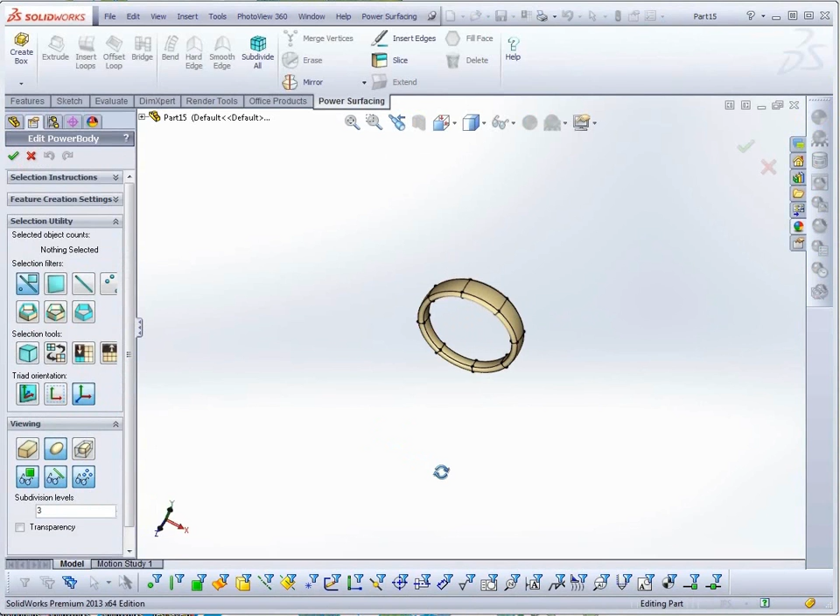The imported models can be simple templates, such as this ring blank, or can be nearly finished models brought in for minor tweaking and the addition of SolidWorks features.

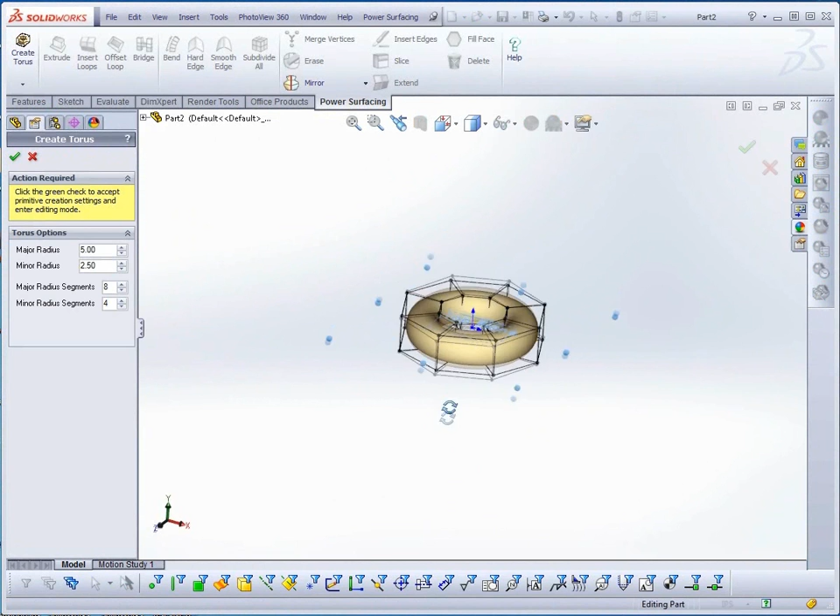Power Surfacing also provides you with several pre-made template objects, the box and torus being the most useful. They are created as extruded meshes at the origin from the top plane. You can set their dimensions and base topology before moving into edit mode.

The secret to efficient sub-D modeling is to work with a minimal amount of geometry as long as possible. Best practice is to avoid adding segments until you actually need them.

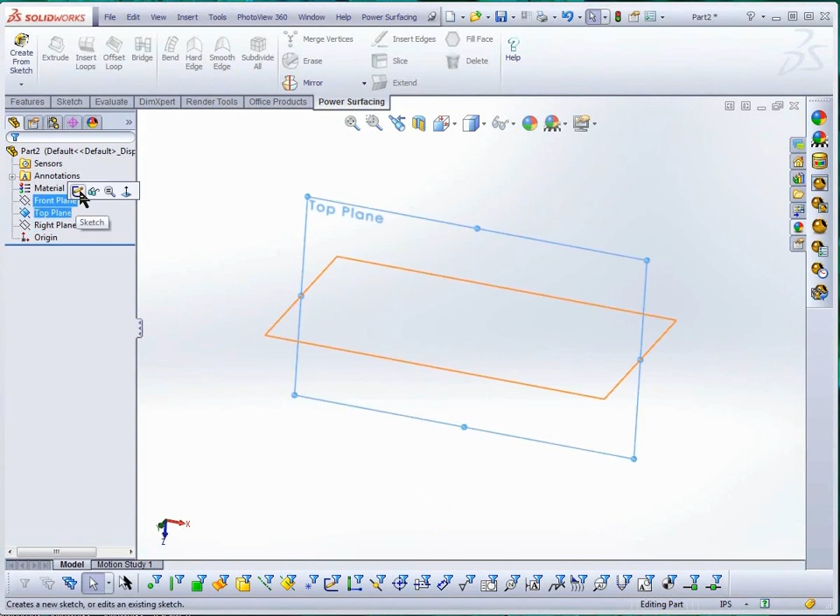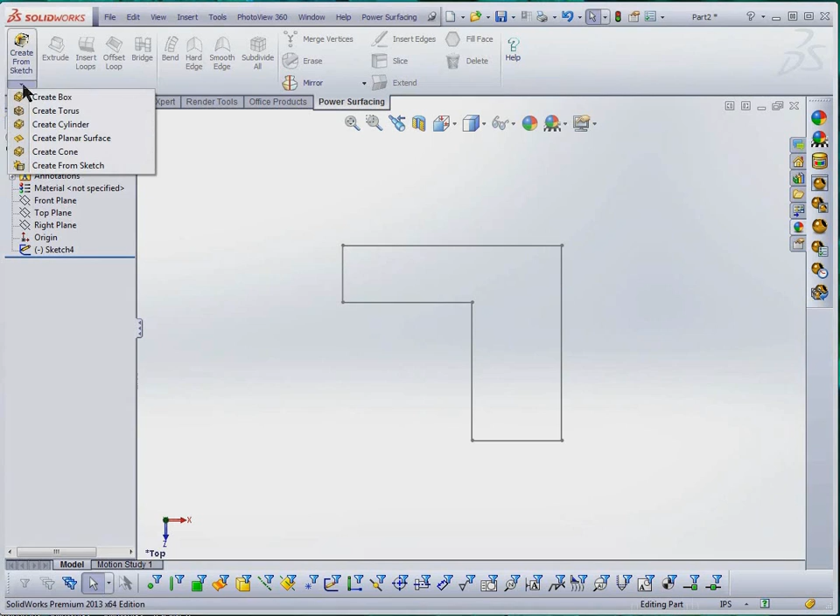The third way to start your sub-D is with a sketch. This allows you to start with a predefined location and orientation. With Create from Sketch, you have two options. As a mesh, the sketch can be extruded up from its construction plane, or both directions from midplane. Sketches over 4 sides will use only the bounding box, so keep it simple.

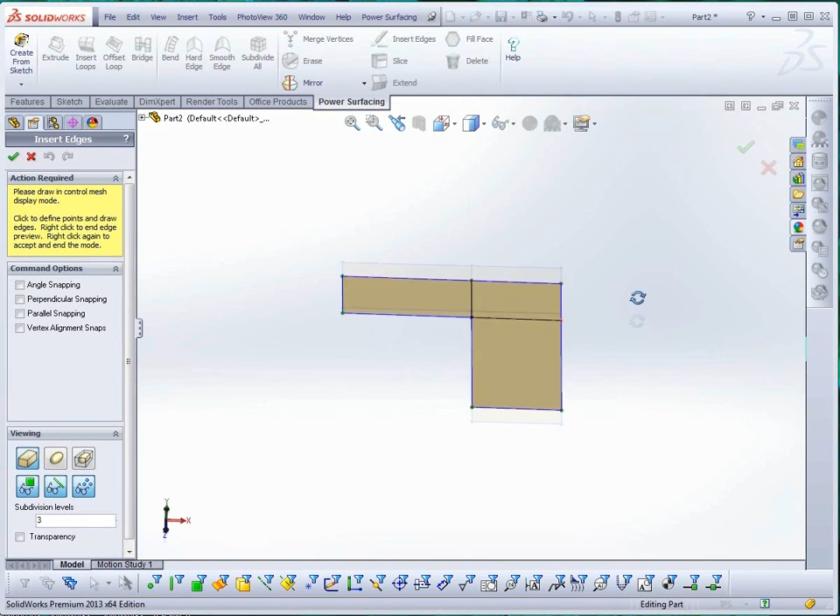The other sketch option is to use the sketch to create a surface. This more advanced option will allow for more than 4 sides, but may require you to manually retopologize the resulting surface. Curved edges will be recalculated based on sides per 360 degrees, so once again, keep things simple to start.

Whatever method you use to start your sub-D, you are defining the control mesh that is used to create the subdivided model. Defining dimensions, location, and orientation is only a starting point.

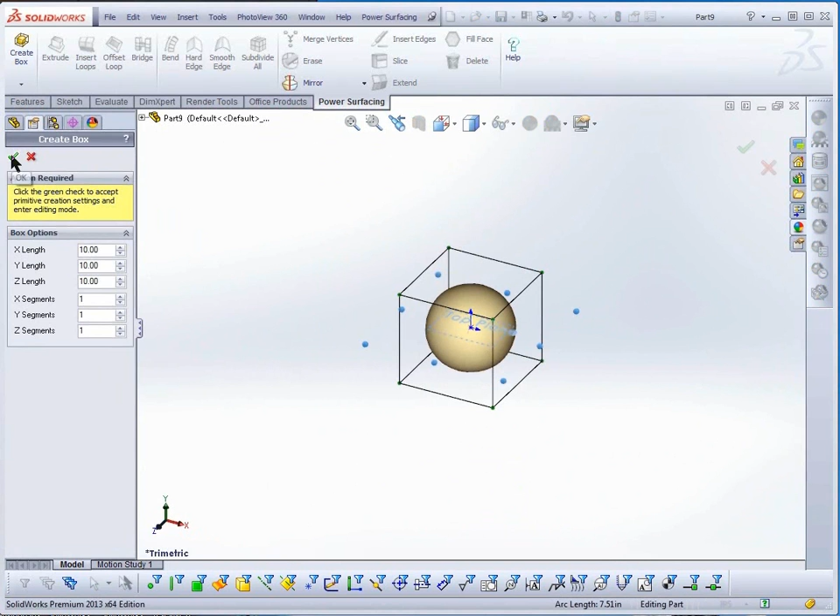That being said, I'm going to begin with the cube primitive. When I'm happy with its parameters, I'll click Accept and go into Edit mode. The newly created sub-D model appears with its control mesh displayed as a cage.

If you are new to sub-D modeling, the most important concept to understand is that sub-Ds subdivide planar faces to create rounded surfaces, and the most desirable face is a quad.

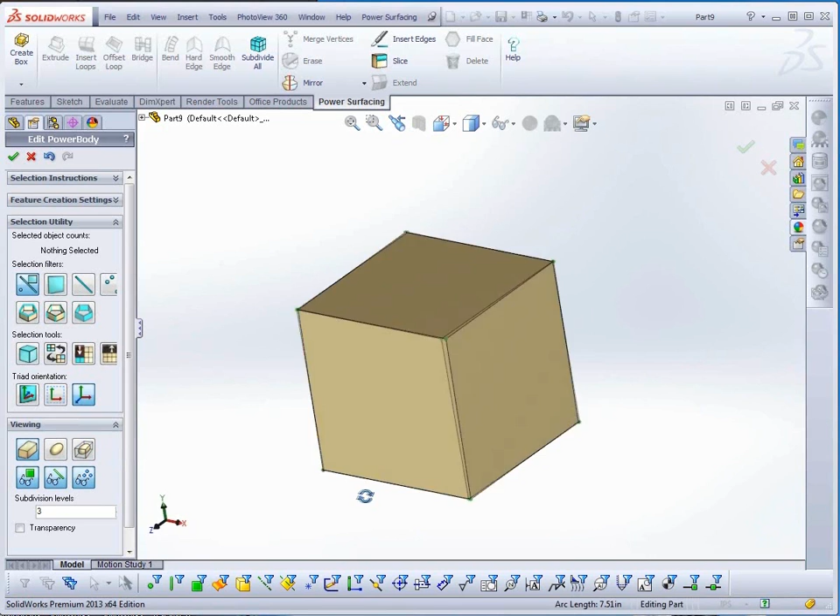In the Command panel, in the Viewing section, try selecting each of the 3 display options. With Control, the control mesh shows the base object or control mesh that is used to create the sub-D model. Sub-D stands for Subdivision Surface.

The sub-D display mode shows the subdivided model along with the control mesh's edges and their new locations. The default display, sub-D plus cage, gives you the best of both while the model is still very simple. It allows for easy manipulation of the faces, edges, and vertices from their control mesh locations while letting you see what the final sub-D mesh looks like.

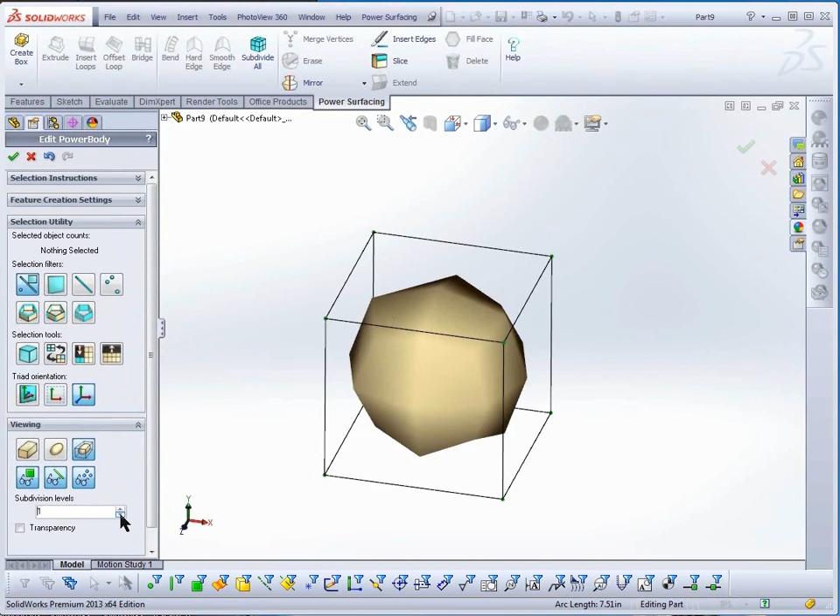You can change the number of sub-D divisions displayed in the viewport from the Viewing section. Note that this will not affect the finished NURBS object.

Let's go ahead and move the mouse over the cage and model. As the cursor passes over the various elements or sub-objects, they are highlighted orange. In the Select Any mode, the default, you can select vertices, edges, or faces by picking the highlighted element. The selected elements will become blue.

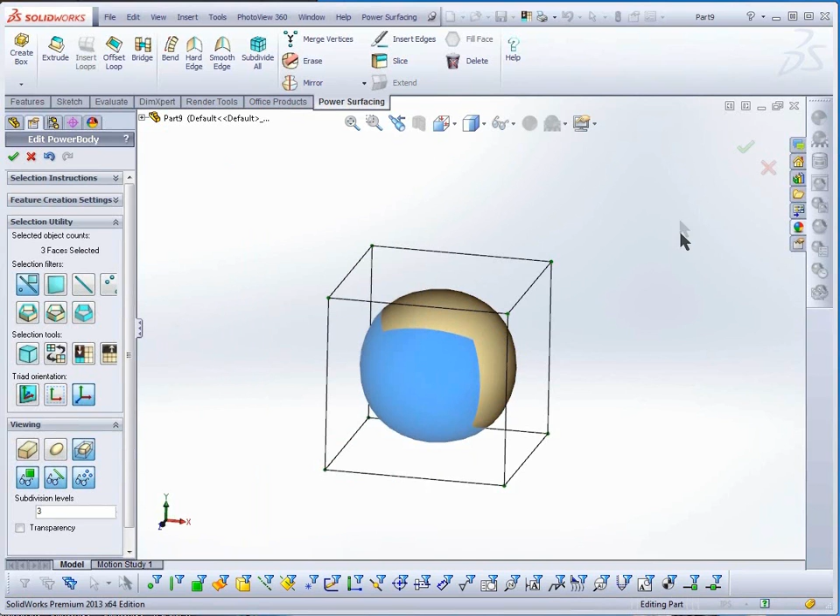You can hold the Control key down and continue picking, or Region Select to add to the selection. Region Select works the same as the rest of SolidWorks. Dragging from left to right selects Windowed, while dragging from right to left selects Crossing.

Note that as soon as you select an element and hold down the Control key, you will only be able to select more of the same type. To remove from the selection, hold the Shift key and pick or region select. Releasing the Shift or Control keys returns to the Select Any mode.

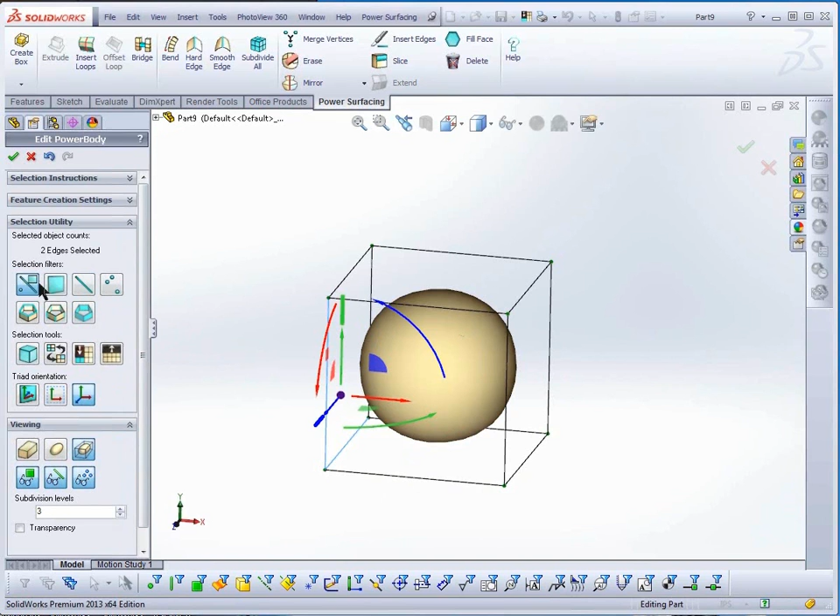To restrict selection to a specific sub-object, you can choose its mode from the Selection utility in the Command panel or from the right-click menu. The right-click menu has several of the most commonly used tools and commands on it. It can also be accessed with the S key.

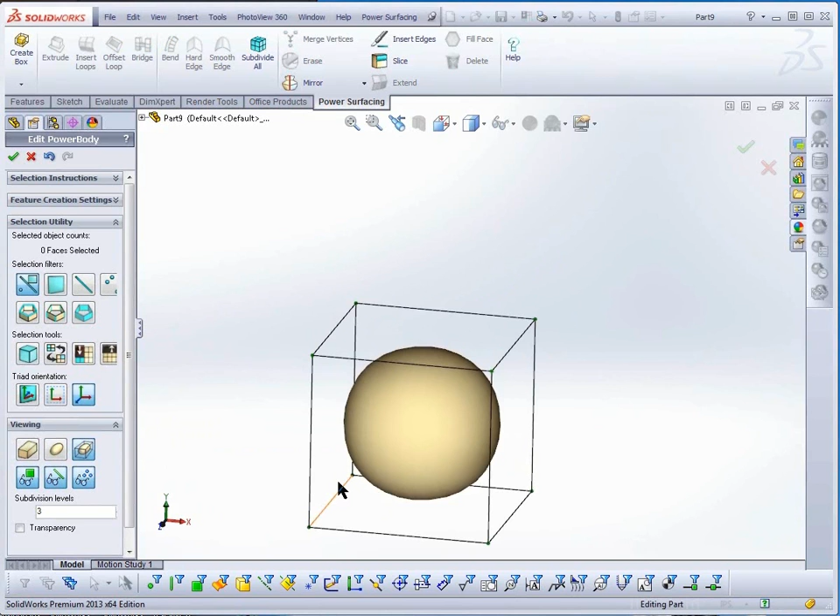The two most common means of editing the sub-D are extruding and creating new edge loops. Power Surfacing has several tools to help you edit your sub-D. Let's start with the Extrude tool.

Select a face on the mesh. Choose Extrude from the right-click menu or from the toolbar. The face is extruded out, and the extrude parameters are shown in the Command Options rollout over in the Command panel. You will also notice that the context-sensitive gizmo has changed to reflect the new options.

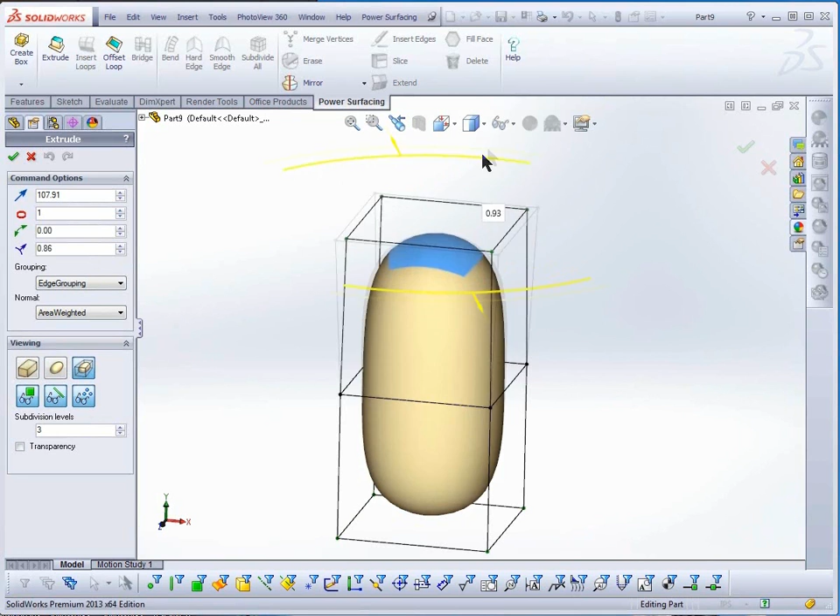With Extrude, you can adjust the extrude distance with the Distance gizmo, scale the extruded face with the blue Expand gizmo, and rotate the face with the green Rotate gizmo. You can also increase the number of segments with the red Increment gizmo. To use it, click and drag up and down in the viewport, regardless of its orientation. You will see these specialty gizmos in several of the other editing tools.

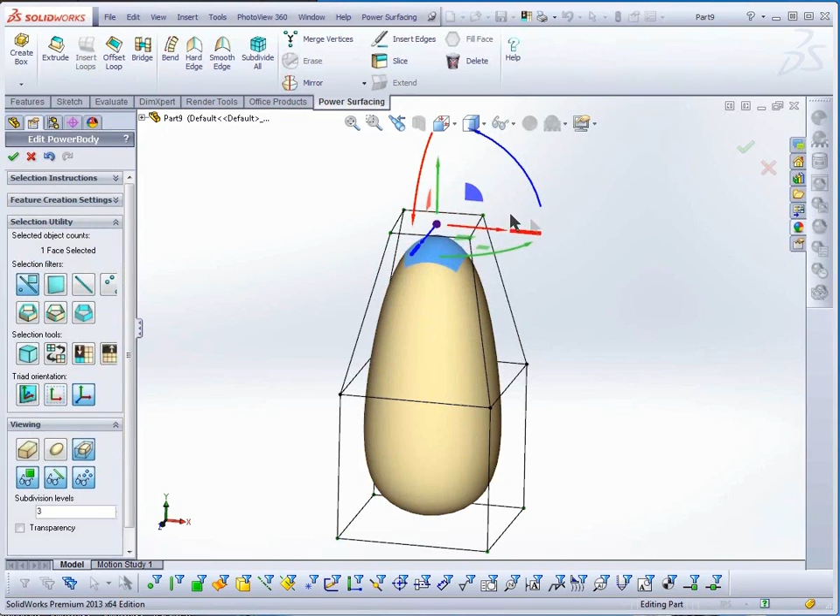To complete the command, right-click, press the familiar green Accept checkmark, or press the Escape key. The Transform gizmo reappears. If you change your mind, simply press the Undo button or Ctrl+Z.

Besides the usual constraints using the X, Y, and Z axes, the Power Surfacing triad allows you to move and scale on two axes at the same time.

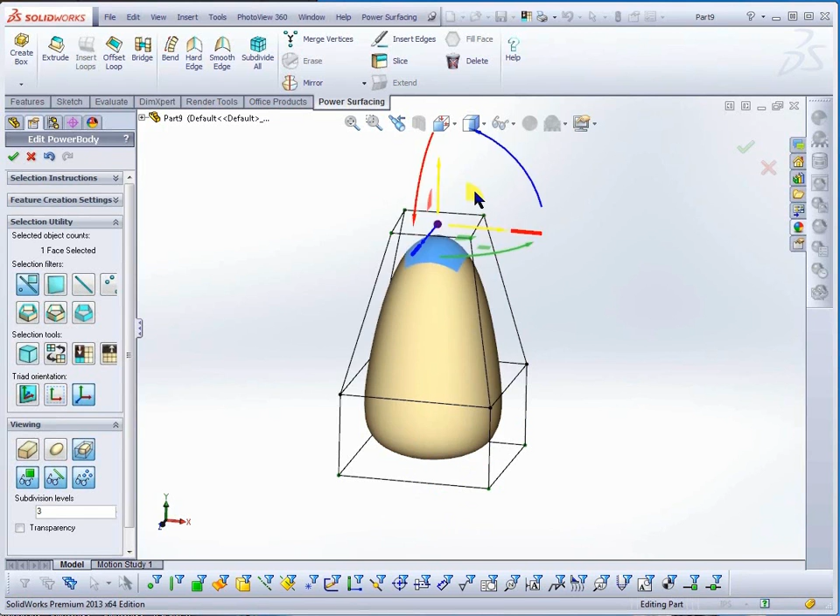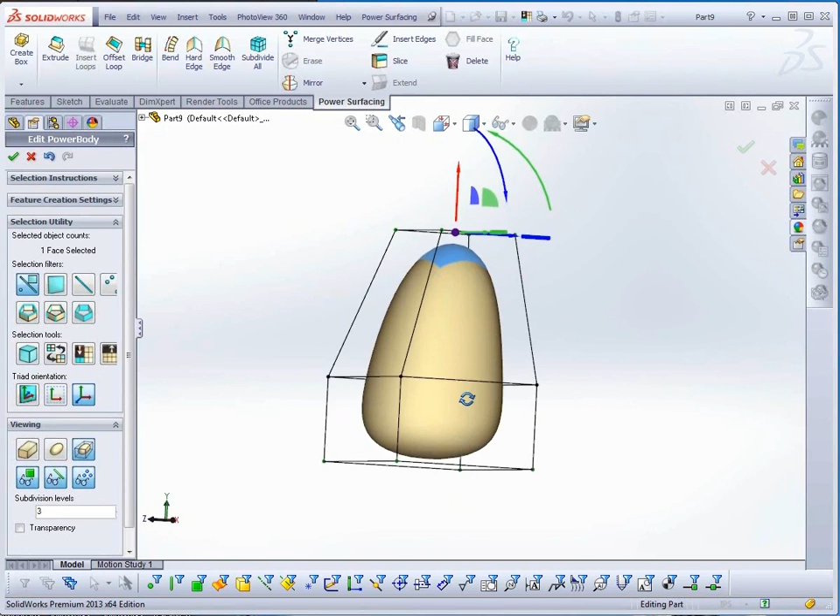The fan-shaped marker lets you move in two directions, and the diamond-shaped marker allows you to perform non-uniform scales along two axes. Uniform scale uses the small sphere at the center of the gizmo.

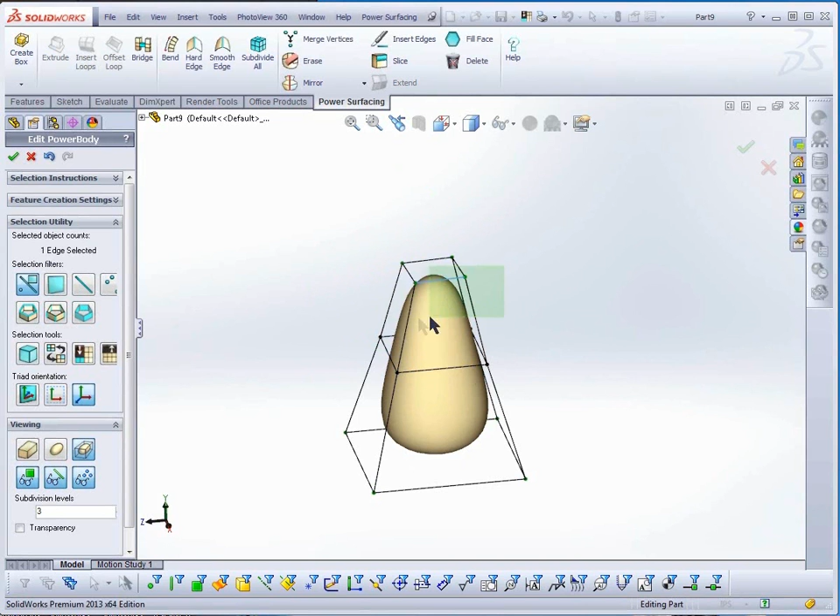The triad, or transform gizmo, is also context sensitive. Only elements relevant to the current selection will be available. Depending on the viewport orientation, you may need to adjust the view to access some of the gizmo elements.

For many of the sub-D modeling tools, you will need to select edges in rings or loops before performing the action. One of the most common selections is an edge ring. You can switch to edge ring selection mode in the Command Manager or through the right-click menu. If you are still in Select Any mode, you can double-click near the center of an edge to select an edge ring.

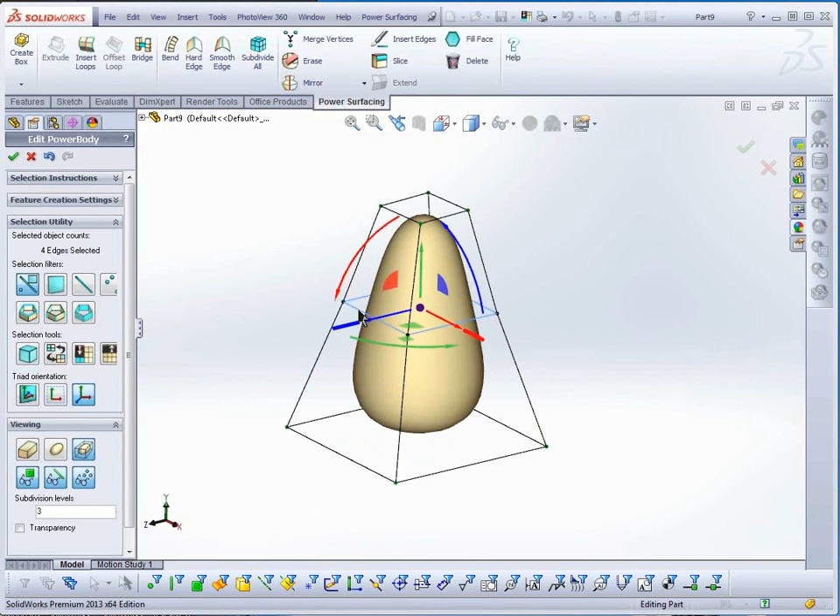Double-clicking near a vertex selects an edge loop. With faces, the edge you select nearest determines which direction a face loop will be selected.

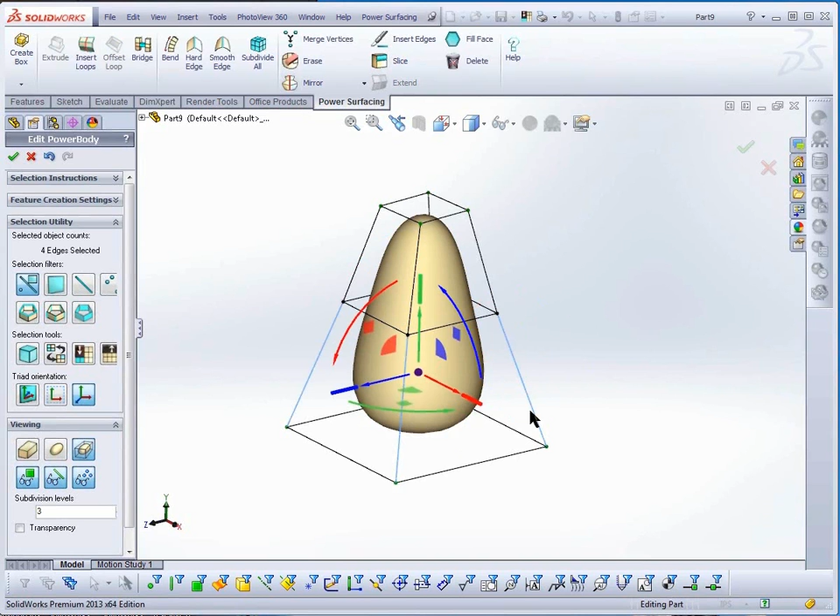Let's try another of the most commonly used tools, Insert Loops. With an edge ring selected, choose Insert Loop from the toolbar or from the right-click menu. As with Extrude, the Insert Loop parameters appear in the left-hand panel under the Command Options, and the gizmo changes to reflect available options.

Set the number of loops to 2. Try adjusting their position with the directional gizmo to slide them, or use Pinch, using the round end of the directional gizmo, to move them closer or further apart from each other. You can also affect the parameters directly in the Command Options.

Once again, press Escape, Accept, or right-click to finish the command.

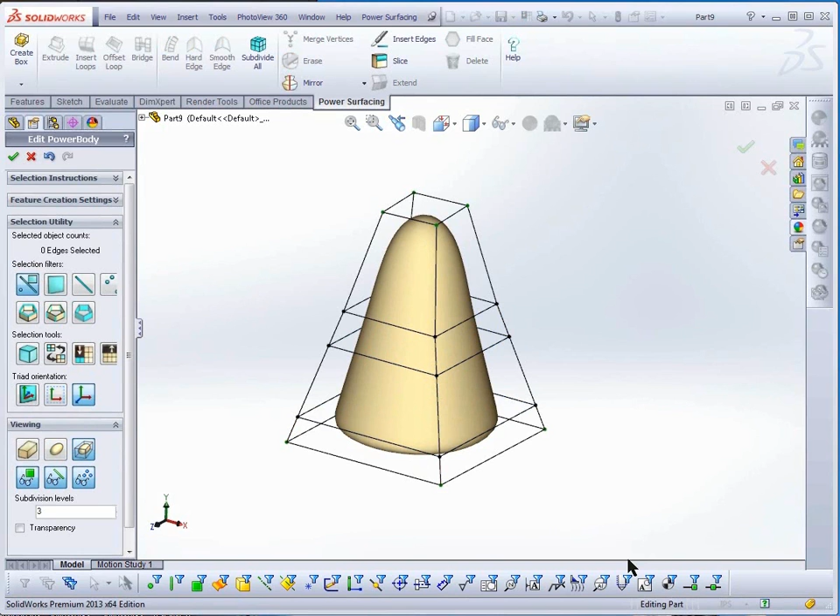Now that you've seen a couple of the tools in action, you may want to know how you can speed up your workflow. Holding the A key on your keyboard puts you into additive mode.

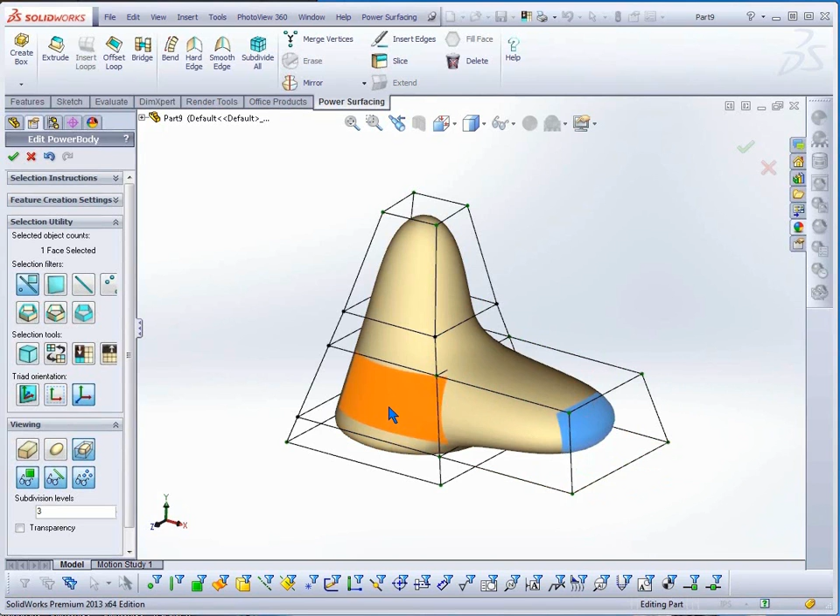Select a face and hold down the A key. Now position the cursor over the transform gizmo axis for the direction you want to extrude. Click and drag the distance you want your extrude to go. When you let up on the mouse button, the command is finished.

The quick extrude also works on open edges, so if you are used to modeling with surfaces rather than volumes, you will probably find it quite useful.

I'll delete a face to give me some open edges. Then select one of them and extend it by holding the A key down as I use the triad to move it.

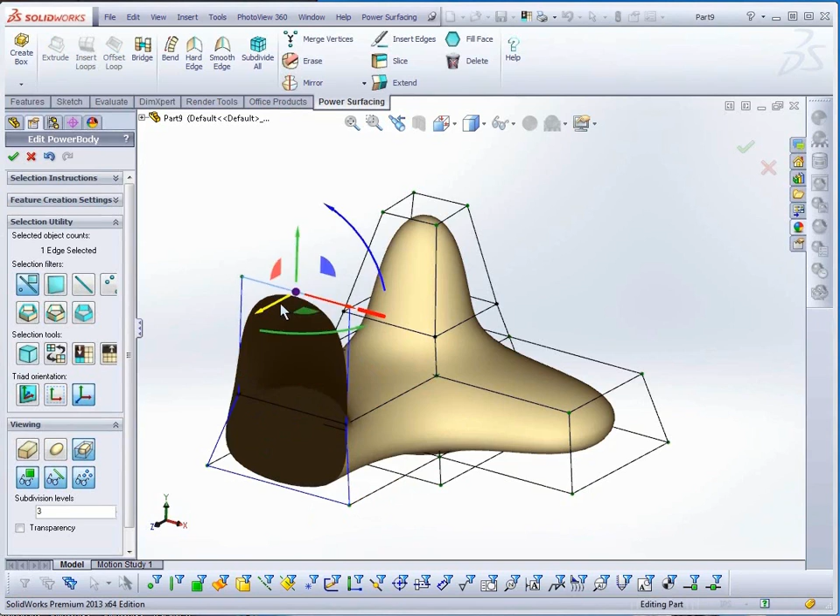I'll do a few undos, and then cap it back up with a fill face from the right-click menu or from the toolbar.

With edges, the A key will allow you to drop edge loops in quickly. Hold the A key down, then hover over an edge. A red preview edge is shown. Picking will create the new loop.

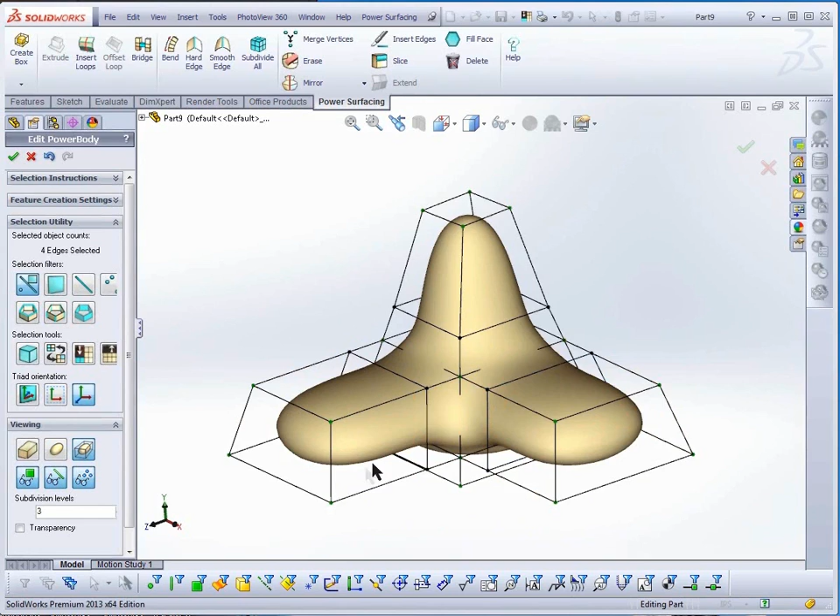Now that we've got something a bit more interesting, let's go ahead and convert it to a NURBS object. When you are not in the middle of a command, the accept and cancel pertain to the current sub-D editing session. The cancel will discard changes you've made since starting the current edit session, while the accept button will convert the model and take you back into the SolidWorks feature tree.

The feature creation settings rollout contain a few options for the conversion. Quality should usually be left on the default, medium. Type gives you 3 conversion options. Normal, the default, creates an optimized NURBS model. Just as with most SolidWorks operations, you will not be able to save the part file in sub-D edit mode.

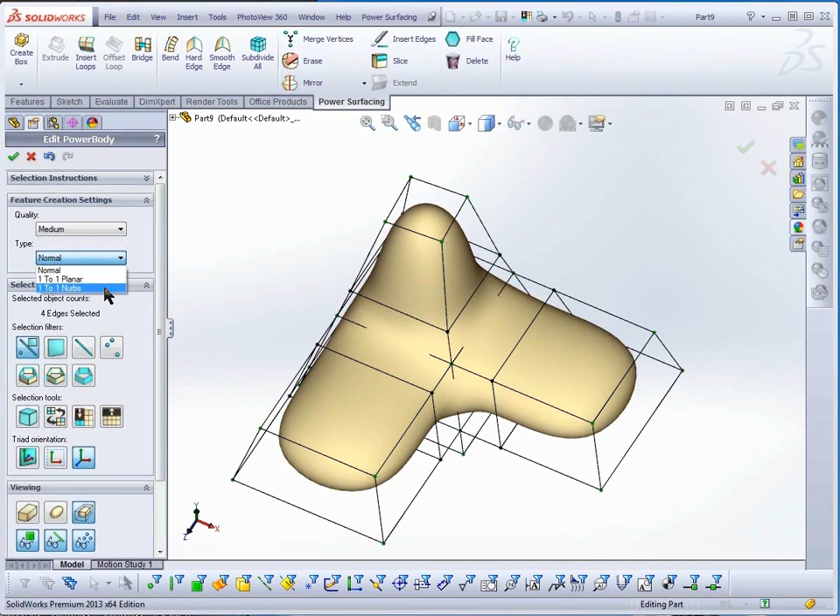One-to-one planar is a quick conversion to let you save your part file without waiting for a long, complicated conversion. One-to-one NURBS will create the NURBS conversion without optimization. Sub-D edges will carry through to the NURBS version of the model. Click the check mark to convert the model.

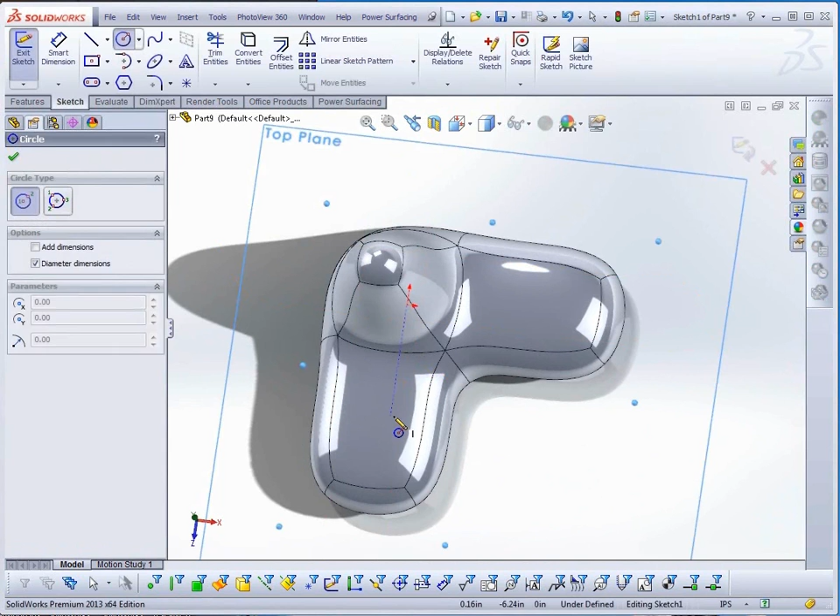Let's add a simple feature. Select a plane and create a quick sketch that will intersect the power body. I'm going to use a circle. Extrude the sketch and fillet the new edge.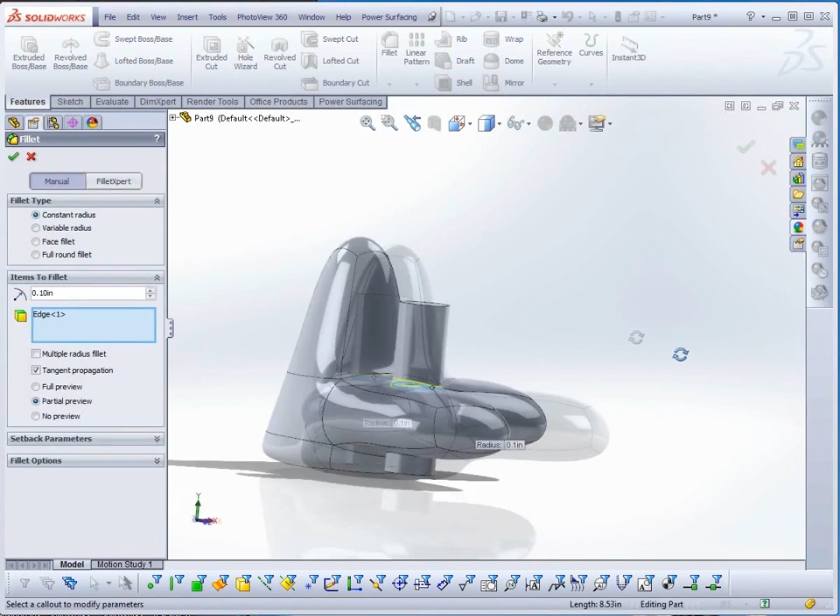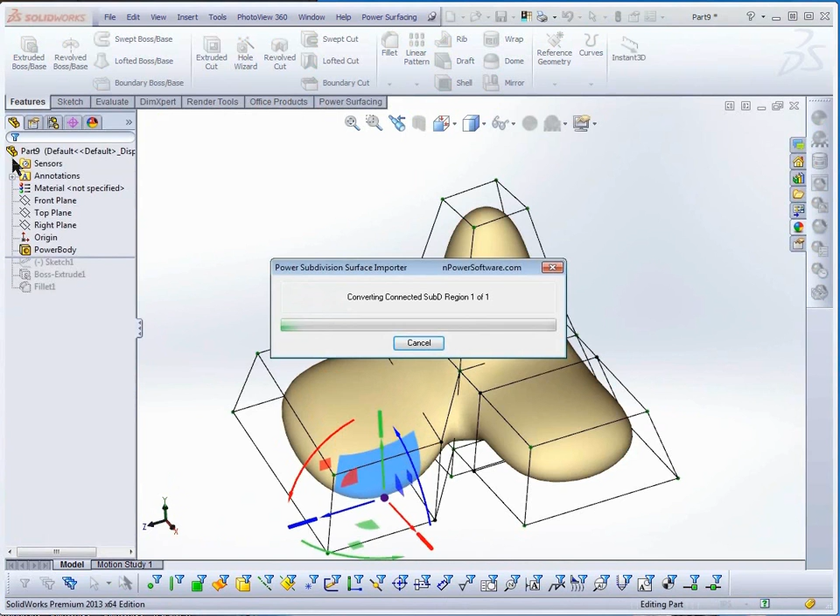To return to edit the sub-D version of the object, select a surface or select the power body in the feature tree. Right-click and choose Edit Feature. Adjust the model and convert again. As long as the mesh hasn't been moved away from the extruded sketch, the features will be retained.

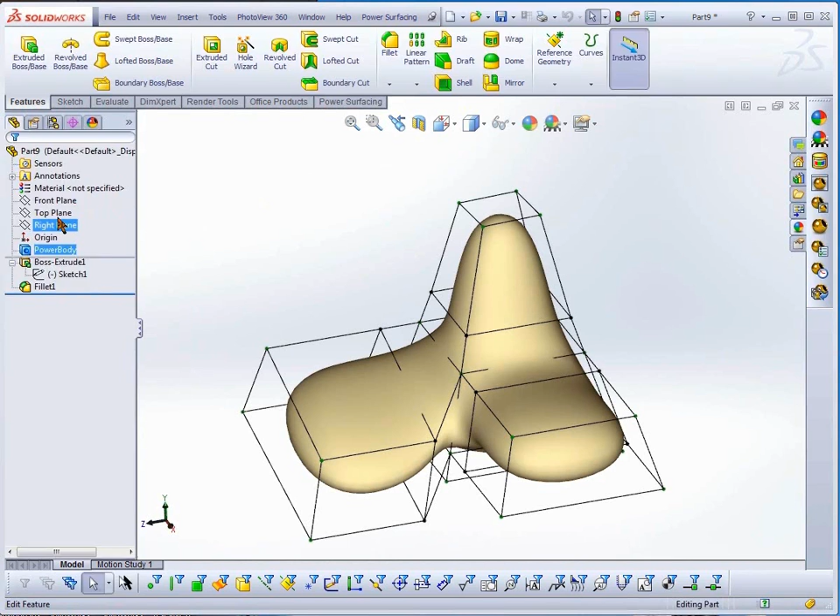Now let's try something that involves the power surfacing object directly. Select the power body and return to Edit Sub-D. Select a face on the top or side, and from the right-click menu, select Hard Edge. The face now has a hard edge, but more importantly, because it was already planar, the combination will allow us to reference it. Convert again.

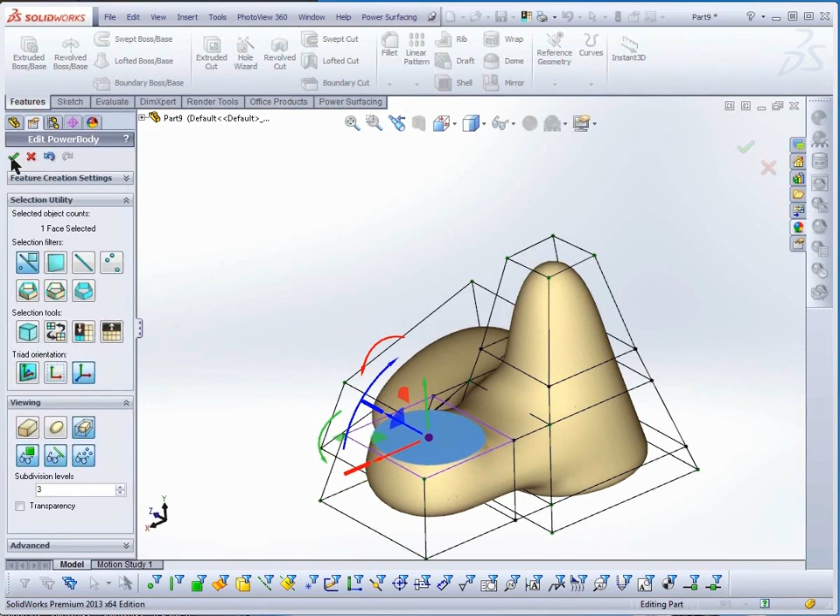Now we can create a new sketch that references the surface. Let's make a circle and use extruded boss again.

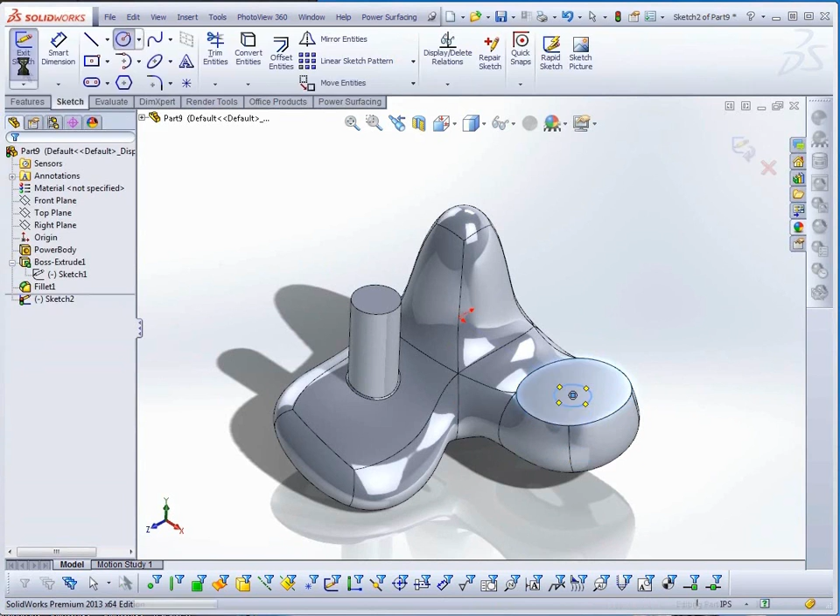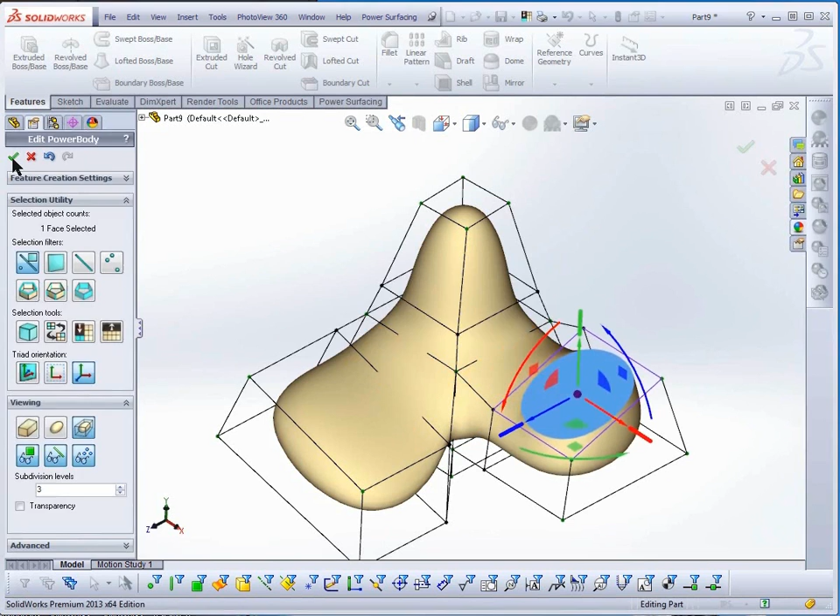Now go back into edit mode, select the face again, and move it slightly and maybe rotate it a bit. And convert. The circle was not set up for any relationships with the actual geometry this time, but you can see that the construction plane itself reflects the changes. Minor adjustments to the sub-D should leave your feature tree intact, allowing for quick and easy design variations or adjustments.

Power surfacing brings a new level of ease to organic modeling in SolidWorks.